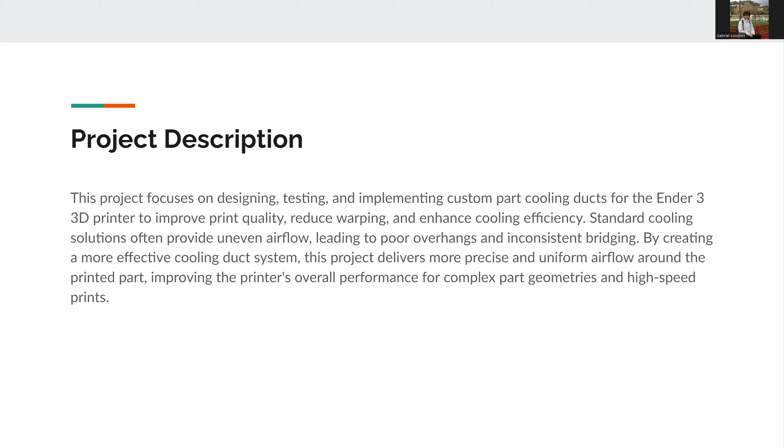So, project description. This project focuses on designing, testing, and implementing custom part cooling ducts for my Ender 3 3D printer to improve print quality, reduce warping, and enhance cooling efficiency. Standard cooling solutions often provide uneven airflow, leading to poor overhangs and inconsistent bridging. By creating a more effective cooling duct system, this project delivers more precise and uniform airflow around the printed part, improving the printer's overall performance for complex part geometries and higher speed prints.

So these are two pictures of the part cooling ducts. The image on the left is the duct by itself with its attachment points, and the image on the right is the duct attached to the tool head along with its 5015 fans slotted in.

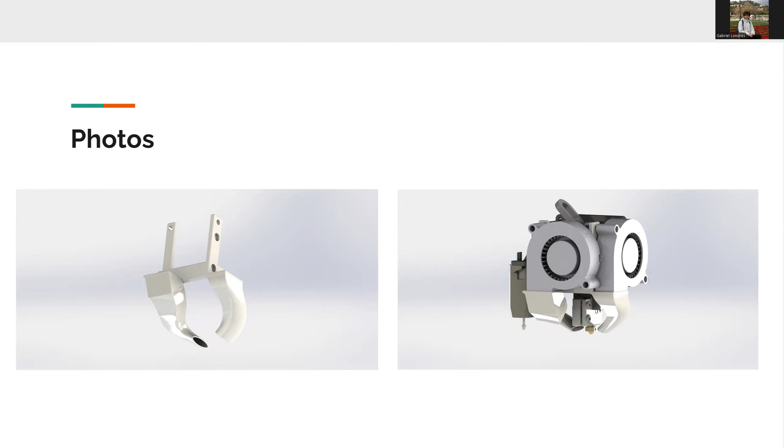So, how do these ducts work? Part cooling ducts are essential in directing airflow from the cooling fan towards the freshly extruded filament, improving print quality by rapidly solidifying the layers. So first, the cooling fan, usually mounted near the hot end or on the side of the extruder assembly, pulls in ambient air from your room, and then the duct collects and channels this air, guiding it through an optimized path to the nozzle's output area.

Next, standard designs often struggle with directing air precisely, but these custom ducts aim to deliver airflow directly where they need to be and with much greater volumetric flow. And this targeted cooling helps each layer solidify much quicker, which prevents sagging and deformation, especially when printing overhangs, bridges, and sharper corners.

So, main printing impacts are on overhangs and bridges, layer adhesion, and surface quality. So, for overhangs and bridges, better cooling allows for more successful bridging and crisper overhangs, since the plastic is basically getting cooled as soon as it exits the nozzle, which allows your printer to basically print in midair, crossing bridges. For layer adhesion, proper cooling ensures the layers fuse well without sagging. And for surface quality, even airflow minimizes defects like blobbing or stringing, which results in much smoother surfaces.

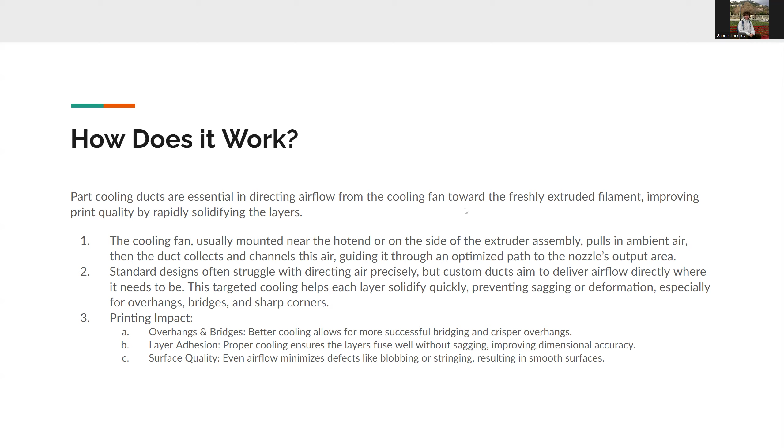So here are a couple more CAD models. The CAD model on the left shows the ducts with the 5015 fans attached to them, and then the images on the right show a more detailed image of the ducts and their outlets next to the nozzle.

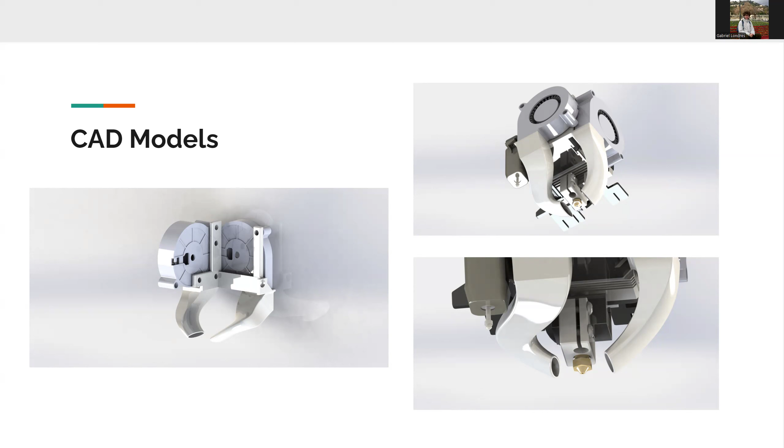So, how is it made? First, the ducts need to be designed. So the duct is designed in a software like Fusion 360, SolidWorks, or Tinkercad. I personally use Fusion 360. The duct design maximizes airflow to the nozzle and part, minimizing turbulence.

So a couple of parameters to consider when designing the ducts. You need to consider nozzle diameter and where the nozzle is, how big the fans you want to use are, and where you want to put them. For example, I use the 5015 radial fans. Compatibility with existing components of the printer, such as the tool head, and finally clearance to avoid hitting other parts, such as when bed leveling, you don't want the tool head to bottom out onto the ducts or any frame rails.

And then once you have designed your ducts, you want to do CFD simulation on it to test airflow patterns and optimize the duct's shape for even air distribution. And then finally, you prototype your ducts. Version of the design is printed using the same printer to ensure fitment and function.

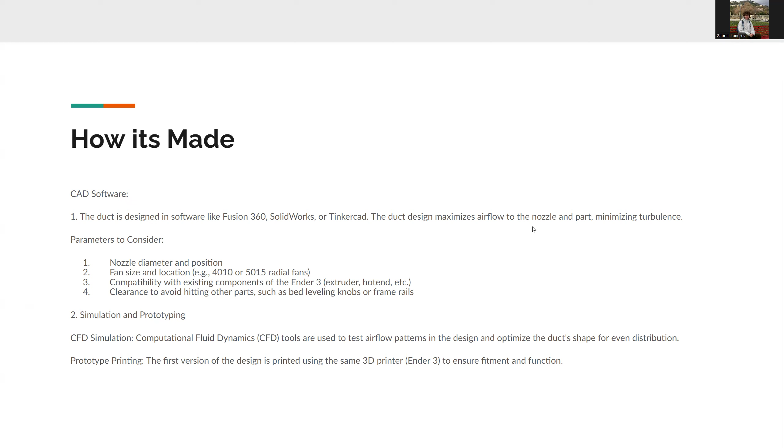So a couple options for manufacturing materials for these ducts. First you have PLA, then PETG, then ABS. So PLA is very easy to print, and has good dimensional accuracy, and it's a nice finish. The problem with PLA is that it has a very low heat resistance, so it's difficult to use them for ducts which are very close to the hot end. The use case for PLA in this situation is for testing initial prototypes.

PETG has a much higher heat resistance than PLA. However, it is slightly more challenging to print due to its high likelihood of stringing. The use case in this scenario is going to be for the material for the final duct because it balances printability with the high durability that these ducts require.

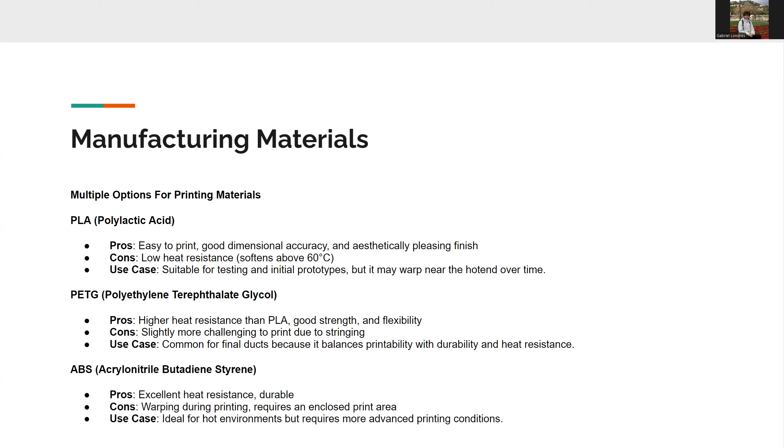And then finally, we have ABS, which has excellent heat resistance and is very durable. However, it's very difficult to print and it requires an enclosure to print. The use case for this is it's ideal for hot environments. So I've chosen PETG plastic to print my ducts.

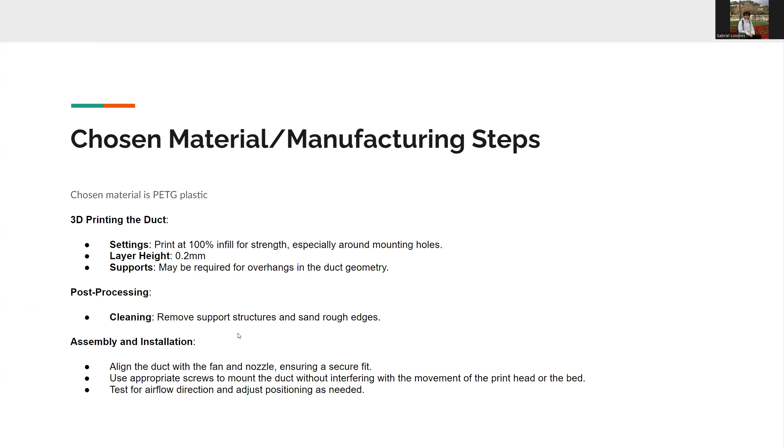Printing the duct settings: print in 100% infill, 0.2 millimeter layer height, and supports. Post-processing: remove supports, sand rough edges, and then assembly and installation is simply placing the ducts onto the tool head.

So a couple advantages of part cooling ducts. You have much improved print quality. As stated before, it prevents warping and curling as it cools the plastic that gets melted much more consistently. You have better overhang and bridge performance, and very much enhanced print speed. With efficient cooling, you can print at much higher speeds without sacrificing quality.